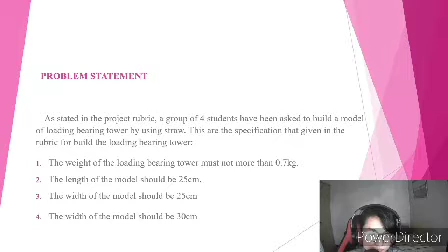These are the specifications given in the rubric for building the load bearing tower. The first one, the weight of the load bearing tower must not be more than 0.7 kg. Secondly, the length of the model should be 25 centimeters. Third, the width of the model should be 25 centimeters. And lastly, the height of the model should be 30 centimeters.

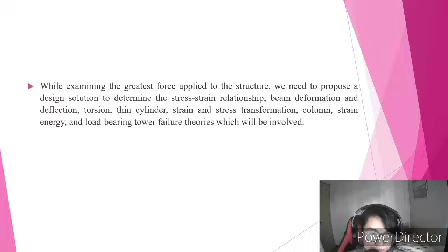While examining the greatest force applied to the structure, we need to propose a design solution to determine the stress-strain relationship, beam deformation and deflection, torsion, thin cylinder, strain and stress transformation, column, strain energy, and load-bearing tower failure theories which will be involved.

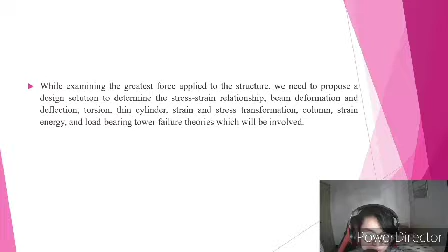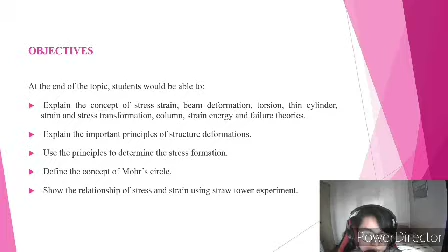For the objectives, at the end of the topic, students will be able to explain the concept of stress strain, beam deformation, torsion, thin cylinder, strain and stress transformation, column, strain energy, and failure theories. Next, students are able to explain the important principles of structure deformation. The third one, use the principles to determine the stress transformation. Define the concept of Mohr's circles, and lastly, are able to show the relationship of stress and strain using the straw tower experiment.

For the objective of the project, the first is to demonstrate a good understanding and commitment within a group in solving the given problem. Next is to study an engineering problem and propose appropriate solutions based on the knowledge of solid mechanics. And last but not least is to write a technical report related to the solid mechanics project.

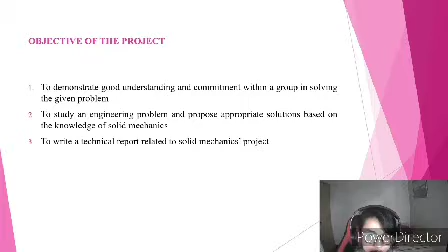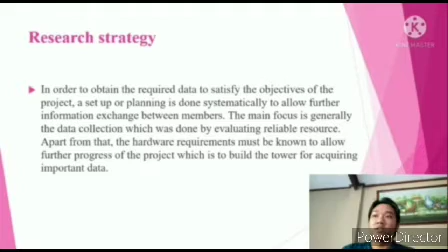Assalamualaikum warahmatullahi wabarakatuh. My name is Muhammad Uzmana bin Muhammad. I will present the methodology of the project. Firstly, I will present about research strategy. In order to obtain the required data to satisfy the objective of the project, a set up or planning is done systematically to allow further information exchange between members.

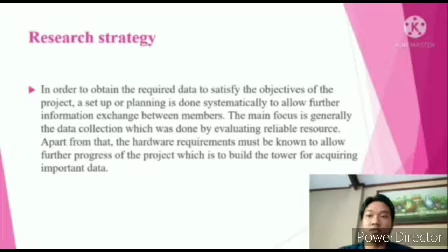The main focus is generally in the data collection, which was done by evaluating reliable resources. Apart from that, the hardware requirements must be known to allow further progress of the project, which is to build the tower for acquiring important data.

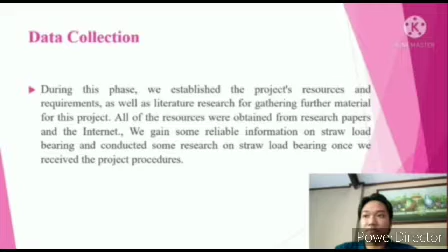Preliminary design. The capacity to withstand enormous weight without distortion makes rectangles the strongest shape to be implemented in the straw tower. The center of gravity of a rectangular structure is more stable than other shapes. The tower is around 25 cm in length, 25 cm in breadth, and 30 cm in height, and must not weigh more than 0.7 kilograms.

The substructure is the most essential element because it supports the whole structure, so it should have the greatest load-bearing capability. Beams are the structure's horizontal members that are responsible for bearing all vertical loads and transmitting force to the columns. The upright pillars, which are columns, act as vertical posts that support the whole structure and prevent lateral movement by transferring compressional pressures from all other structures.

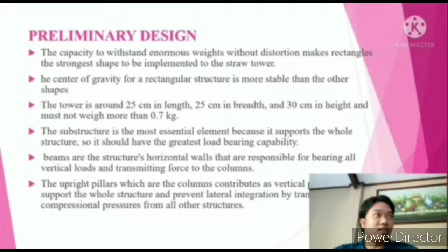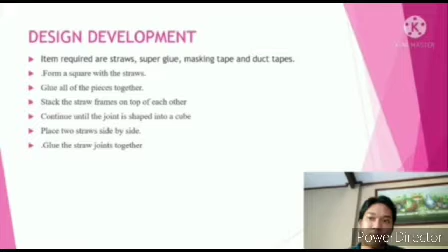As for the design development, items required are straws, superglue, masking tape, and duct tape. Firstly, we must form a square with straws, glue all the pieces together, stack the straw frames on top of each other, continue until the joined shape becomes a cube, place the straws side by side, and glue the straws all together. So, yeah. In this slide, I will present to you the prototype design in Onshape.

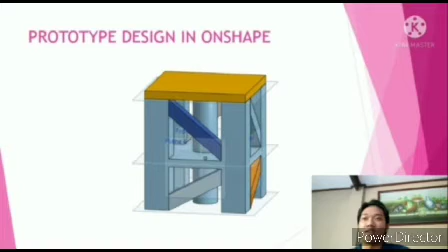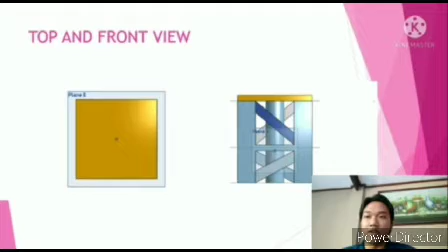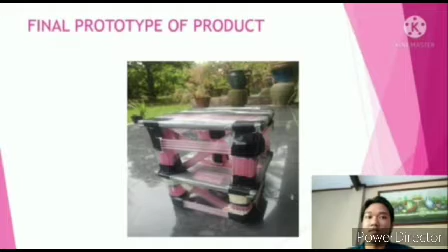Hi everyone, my name is Silaja Barnabas, and today I'm going to present about result and calculation. Firstly, the durability test is passed by our load-bearing tower. The weights we used are 10 kg, 15 kg, 20 kg, 25 kg, and lastly 27 kg.

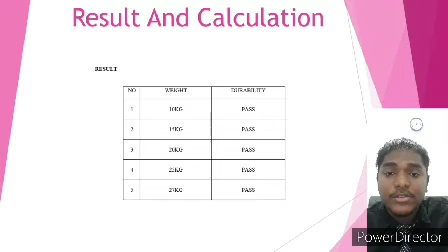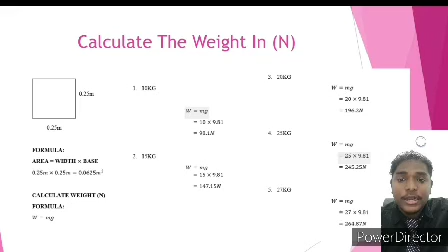Next, we should calculate the area of the tower. The formula to calculate area is area equals width times base. The next calculation is to calculate the weight in Newtons. The formula is W equals mg, which is weight equals mass times gravity, and the gravity is 9.81. The next calculation is stress.

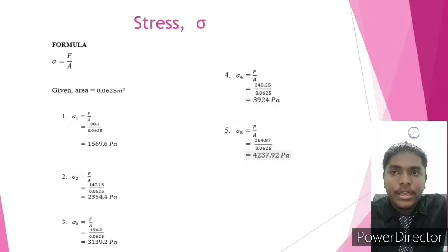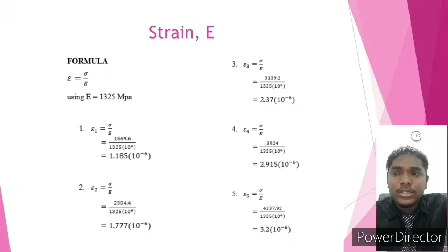The formula for stress is stress equals F over A. The F is force and the A is area in the formula. Also, the next calculation is strain, and its formula is strain equals stress over Young's modulus. The Young's modulus is equal to 1325 megapascal. The next slide is about column buckling and bending moment calculation.

The formula for column buckling calculation is I equals base times depth to the power of 3 over 12. And the next formula for column buckling is PCR equals pi squared times Young's modulus times I, which is the previous answer from the previous formula, over k, which is 2, times length times length.

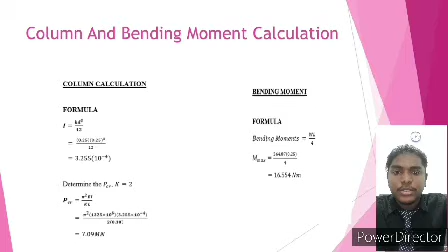Following this, the next calculation is bending moment, and the formula is bending moment equals weight times length over 4. In this slide, we have calculated the Mohr's circle and the formulas. The first formula is stress max equals bending moment times centroid over column buckling, and the second formula is centroid x equals length over 2. The third one is centroid y-axis equals width over 2, and the last formula is tension xy equals tension max.

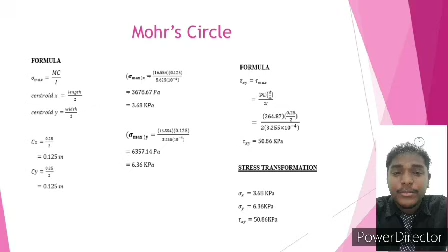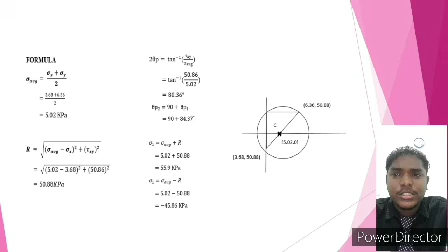The final slide is about stress transformation. The formula to get stress average is stress x plus stress y over 2. Finally, after getting all the answers, we need to plot the data into the Mohr's circle, which is stress x-axis equals 3.68 kilopascal, the stress y-axis equals 6.36 kilopascal, and the tension for the xy axis is 50.86 kilopascal.

To sum up this project of straw building prototype, our project has achieved the objectives, although we did face a few problems here and there. Secondly, the failure that occurs is due to some error, especially when assembling the prototype. Besides, to make the prototype a successful one, our group has been working on getting a better design and calculation. Other than that, we get to understand more about the application of solid mechanics while working on this project.

And lastly, our team also learned about the strategy and content, as well as assessing a particular assignment in its totality, utilizing the criteria supplied and finding success in all of the concepts we have tried. As explained in this project, this may be turned into a lesson focused on the design process that can be finished in one class session or less, or an assignment that covers all aspects of the design process and can be worked on for a week or more.

Then, in order to decrease the chance of expensive failure, we must determine which design is more successful in certain situations. Other than that, the tower of straw activity can be posed as developing an inexpensive hands-on model of the design of a tower, in which the number of loads supported is indicative of the amount of durability or the amount of pressure, to create a greater tie into real-world design.